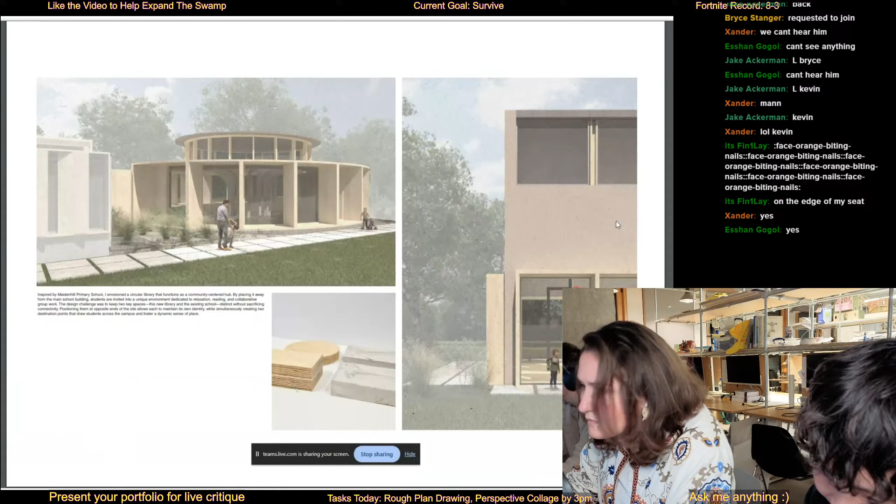With this project, I wanted to have these 2 kind of destinations on either side of the school. So there's this circular library here, and then this big hall.

The hall is positioned as a more public space, accessible by the community. The library is a bit more private, a bit more closed off, and it acts as like a destination for the students in the school.

That's a little image of a floor model I did, exploring the 2 different sides of the school, the library and the hall.

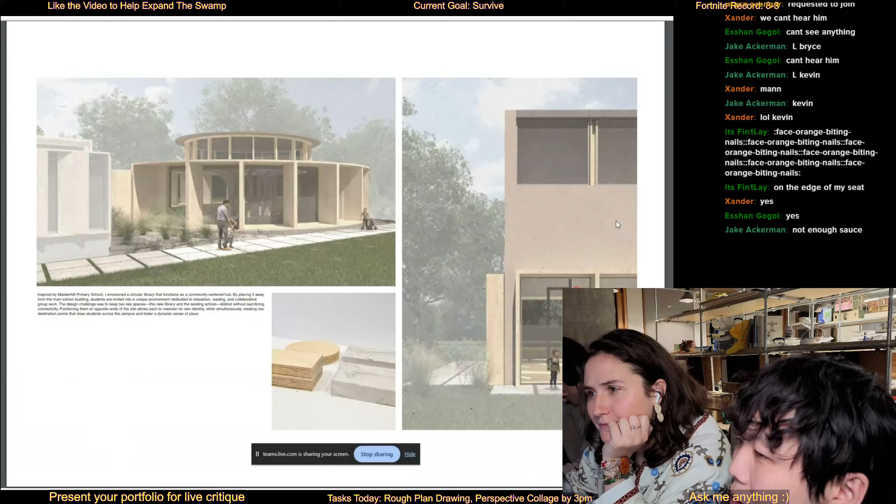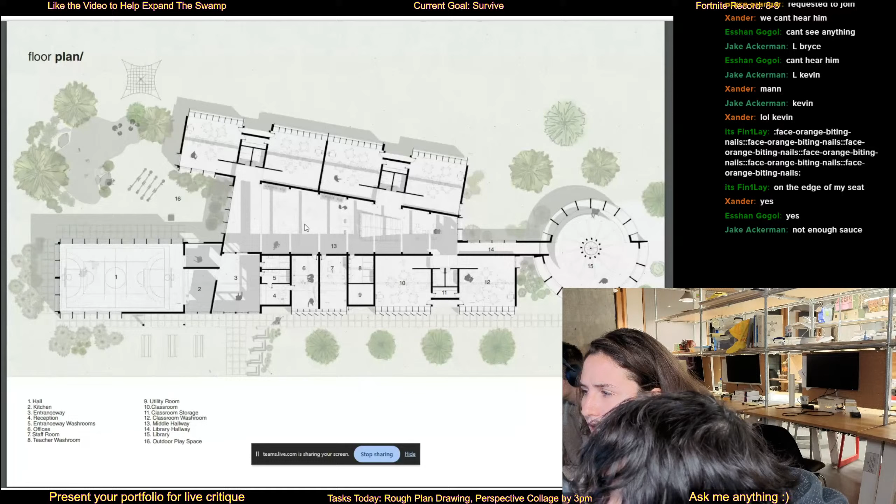There are group meeting spaces, benches, public spaces, private study pods, and that directs you all the way to this circular library here, which acts as the destination for the students in the school.

With our classrooms, you have this divided space in the middle, with storage and washrooms that provide service for both sides of the classroom. On the south-facing facade, you have these window slats that block the light for daylighting.

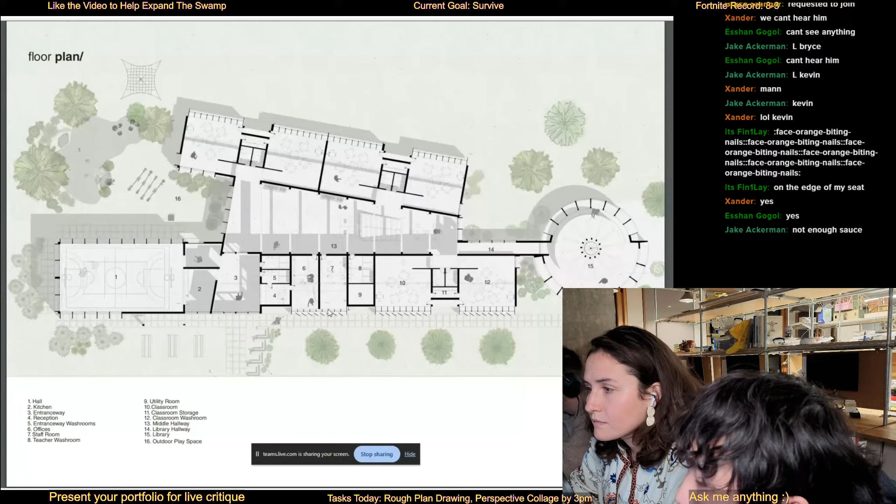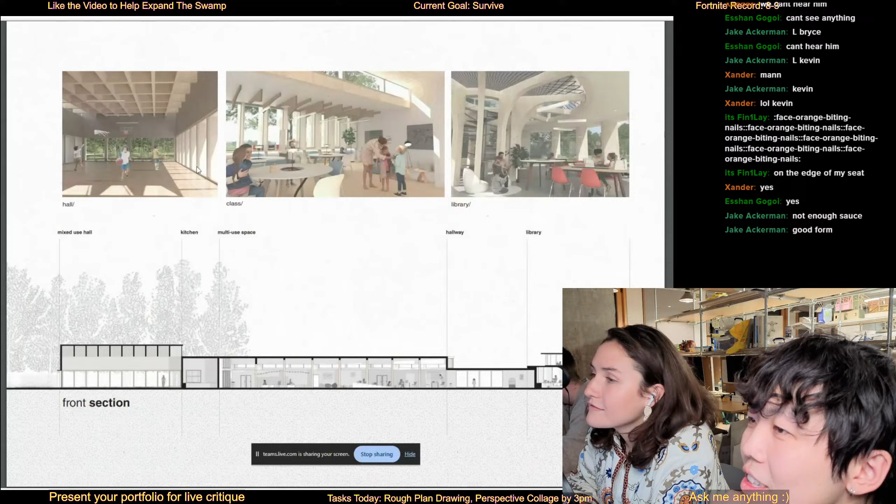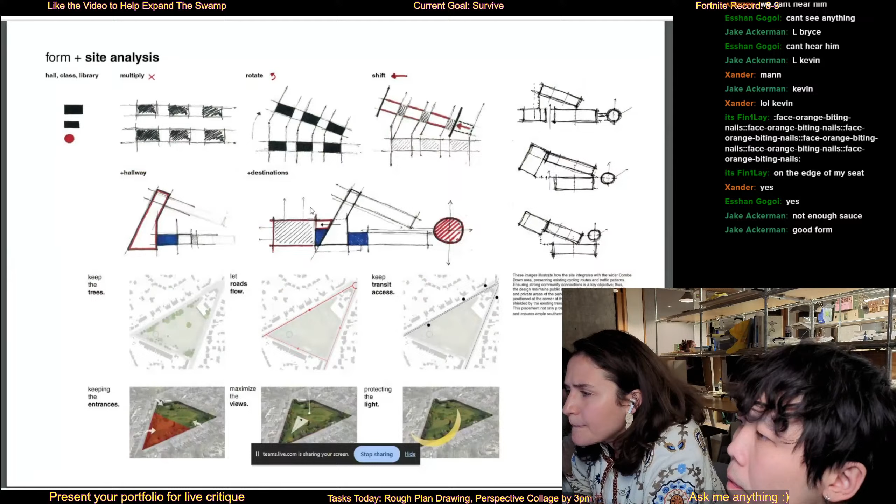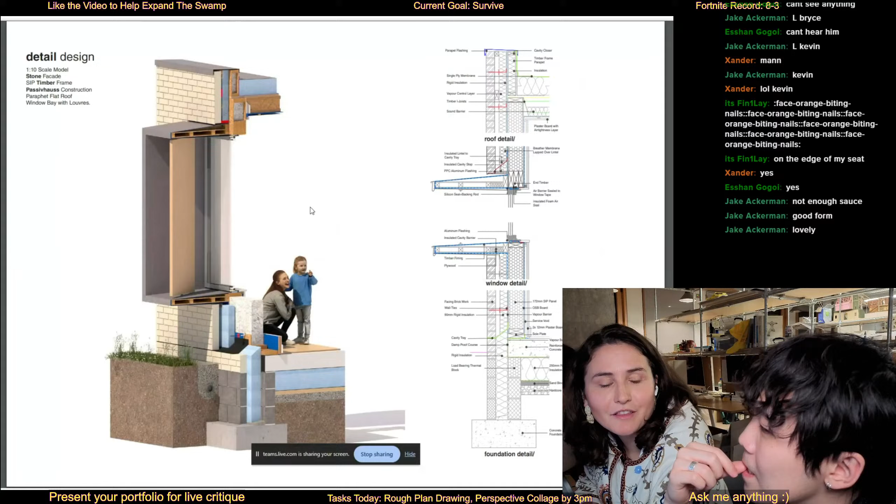Do you want me to just continue, or respond to each slide? Is this the end of this project? We could say stuff about each project rather than... I say we go through the whole thing. Okay, yeah, I think we can go through the whole thing and then go back through it. Okay, fair, let's do that.

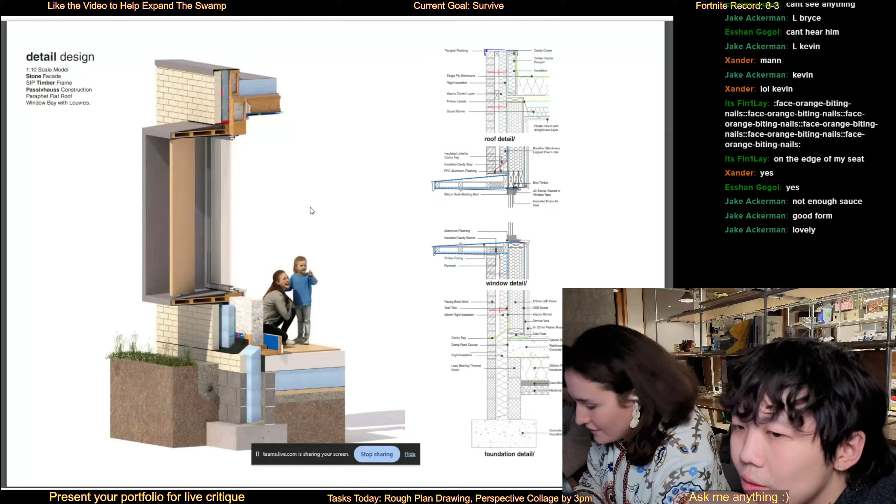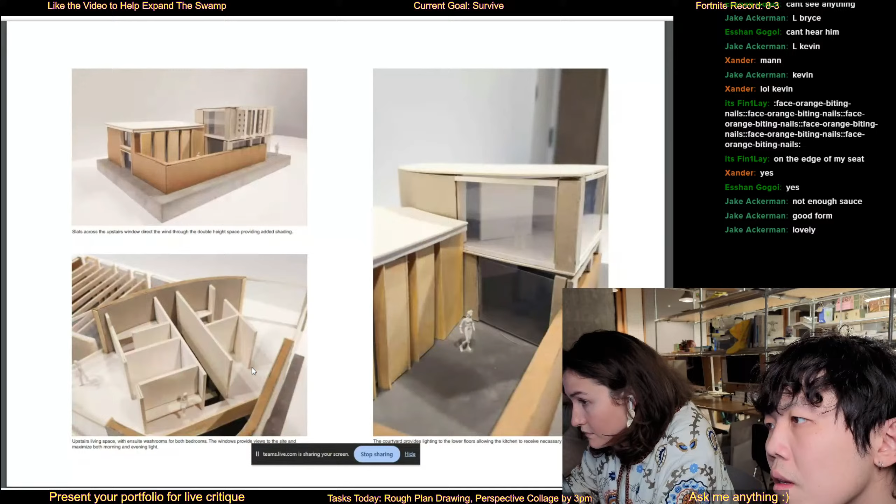Second project here is a house. This was a first year project, end of first year, built for a boat builder on a remote island with a perimeter wall we had to keep, which is why there's this big brown wall. You chose a house based on which artisan you wanted to make it for, and I wanted to do a boat builder. This is a full 1:50 scale model with a concrete base, and you can open up each roof and look inside to see all the details on both floors.

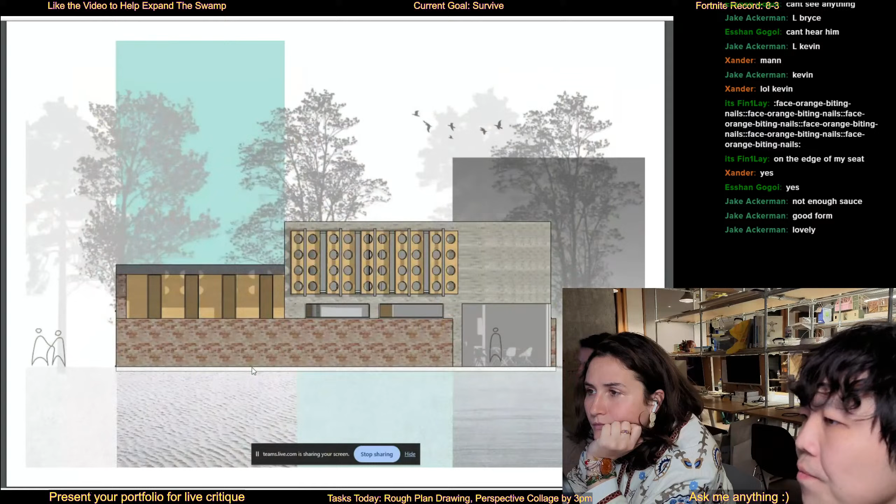That's just the elevation of the house. The form is inspired by the shape of a boat, so you have this curved upper floor, and the challenge was providing circulation while keeping the two spaces separate. These are some concept models working through how to deal with this curved form and bring it all the way down to the bottom floor. That was quite a challenge on this project.

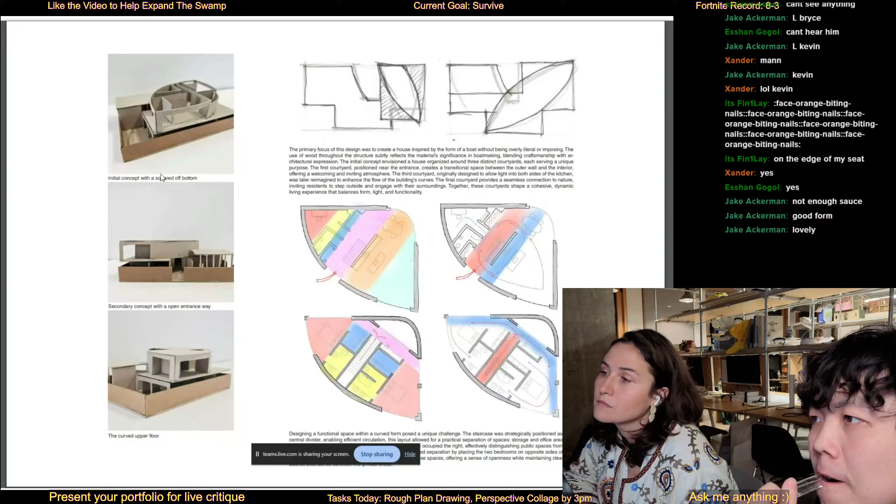I have this dividing staircase in the middle that separates the two spaces. There's an open concept living-dining area, storage along the entranceway, then a washroom with a little office. You come up the second stair to two bedrooms with washrooms and walk-in closets along that side, with a double height opening across the hallway. Sorry, I skipped a few pages there.

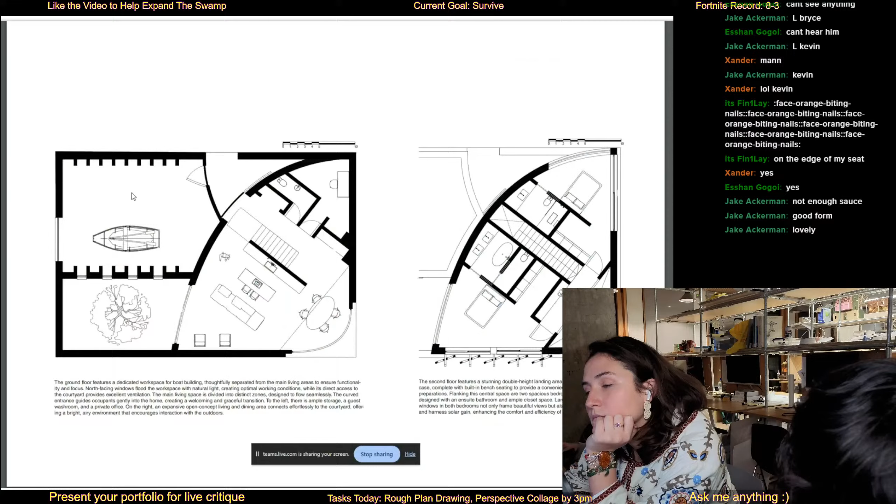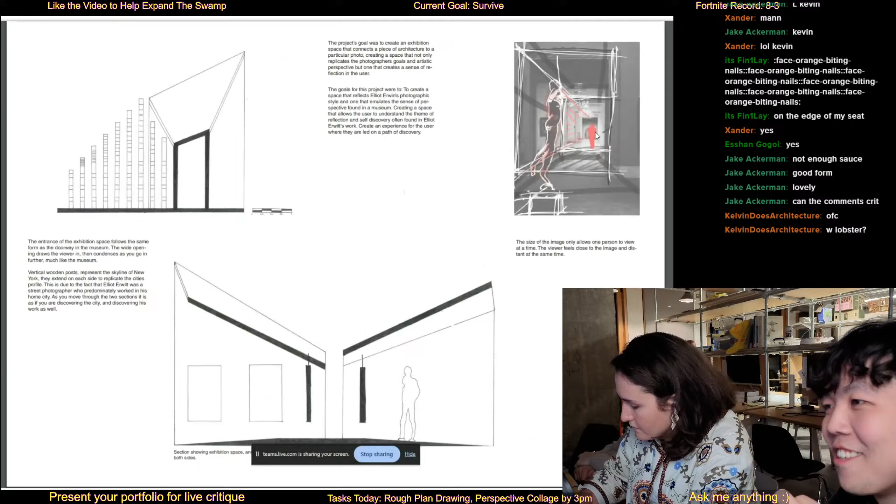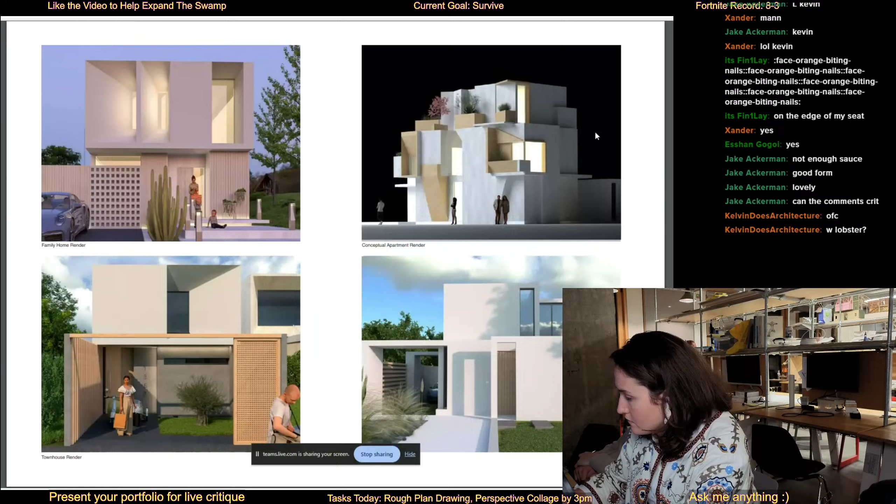So I'm trying to follow the same form of the photograph and create that same feeling that you get when you look at it, basically in the building. Some hand-drawn sketches, and then we have some renders that I've done in my own time, just of homes and kind of conceptual forms and buildings.

Sorry, give me one second. I think, are you muted or something? Yeah, sorry, can't quite hear you. Someone was asking us a question.

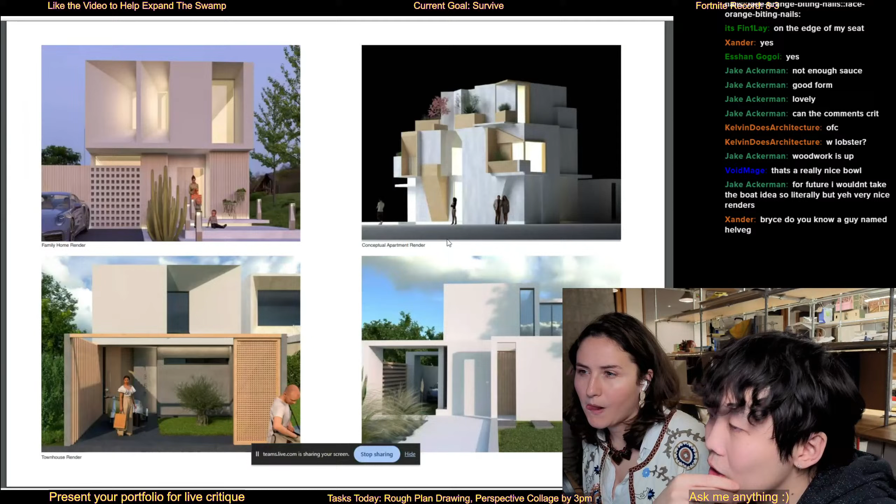Wait, so what's the chronological order of things happening? Which project was first, your earliest project? This stuff is like the earliest. It goes from basically newest to oldest. Oh, this was the oldest. Oh, okay, interesting. And then I think that's a good way of ordering it, though.

Yeah, definitely. I just wasn't sure because you said that one was before school started, the really cool neon lights one, and I wasn't sure what you were doing. I was like, how is he doing all this stuff before school? So I just wanted to check. Yeah, this one was actually before university. I had this class in school and I kind of just made this model. So everything after this is also before school.

Yes, cool. Yana, I'll let you take the lead here. She wants to talk. Okay, I really, really like it. And considering your second year and the work that you had in first year, it's amazing. The attention to detail is amazing.

I will say I really, really liked the pavilion that you did for the photographer, for Elliott Erwitt. Because I feel like that project had a lot of soul, and the way that you told the story of how you came up with the form, I wish you kept that same energy with the way that you tell your university projects as well.

Because the way that you considered the buildings also reminded me a lot of how they did it. Have you watched The Joker with Joaquin Phoenix? I have not. No. You should watch it, it's pretty cool.

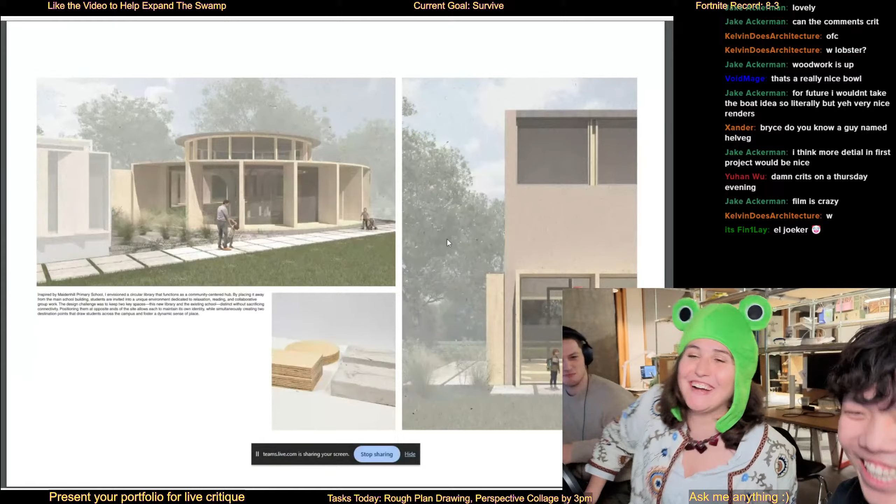ChatGPT does this thing with text where it always puts a dash and then 3 descriptive words after something. So whenever you have a dash - I'm not saying you've used it, but... Oh no, much better. I'll fully admit to it, I've definitely used ChatGPT here. And you called me out on it perfectly. Firing out the accusations - sorry.

Baseless, sorry, but I will say the one giveaway I can always tell is that it has a dash and then 3 descriptive adjectives - like where it says 'key spaces dash this new library and the existing school dash distinct' without sacrificing blah blah blah. You don't naturally use a dash when you're writing text. Yeah, that's very true, okay, very well true. You don't, because you can have such nice connecting words and you don't need to use a dash, you can use something better.

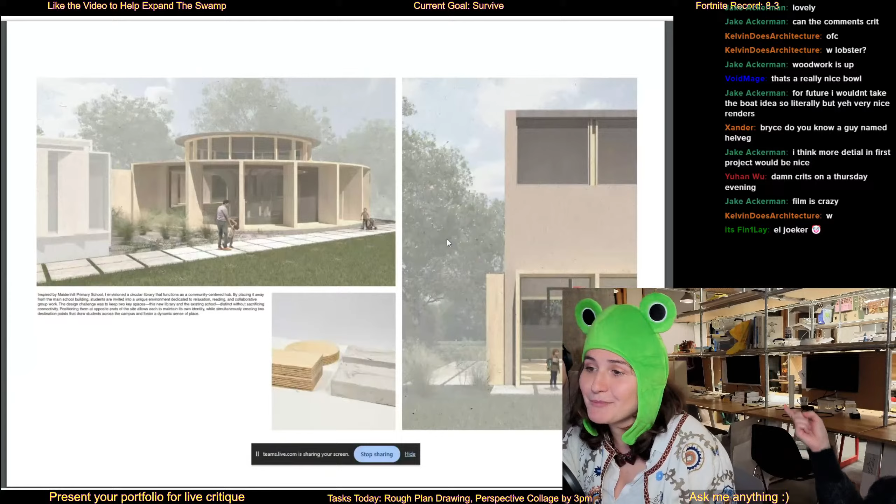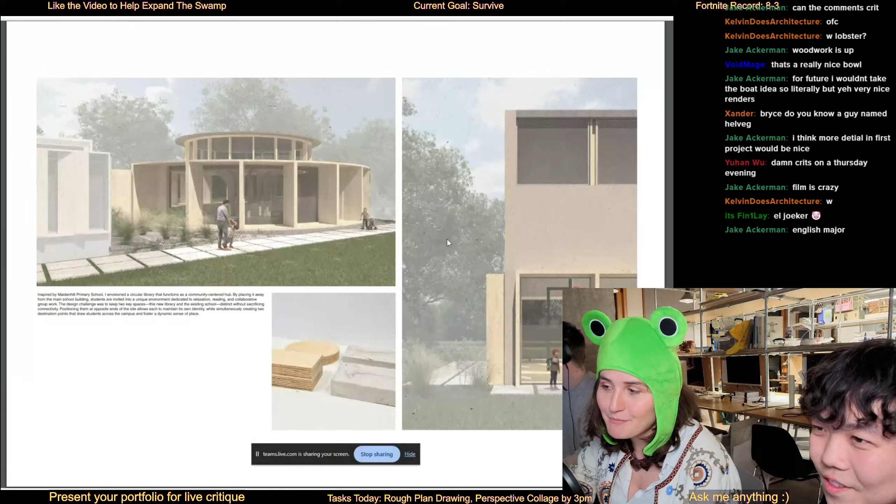Also, I love the quality of these renders. They're very delicate and I feel like they'll come in useful in practice, but I feel like you still need to keep the same magic that you had in your personal projects within the projects you do at uni, because you can tell there's a lot more soul in those projects and a lot more story. If you present them in the same way you told the story of the pavilion, I'd be much more convinced. But this is gorgeous, very cool.

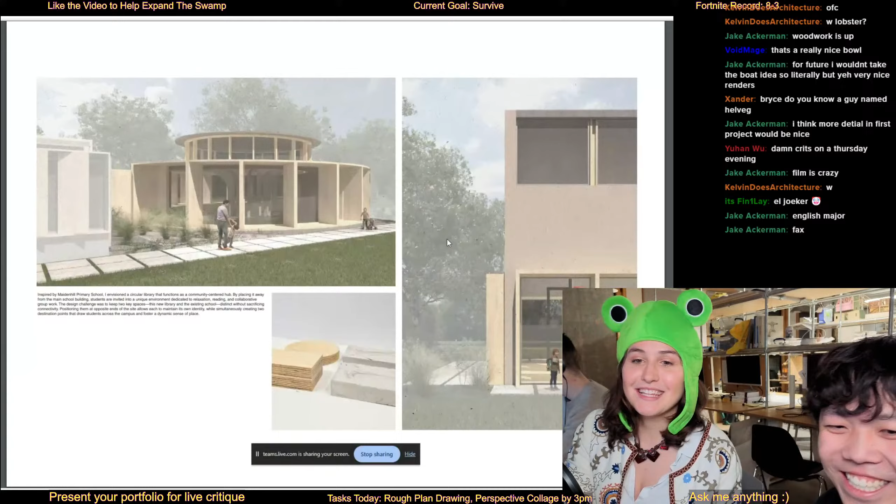What else do I have? Also, in your text - if you keep going down, there's one simple thing you can do to take off. Is he still here? Yeah, no, I'm still here. Yeah, sorry, where should I go? If there's one simple thing you can do in InDesign to take away hyphenation, it just makes it a lot better.

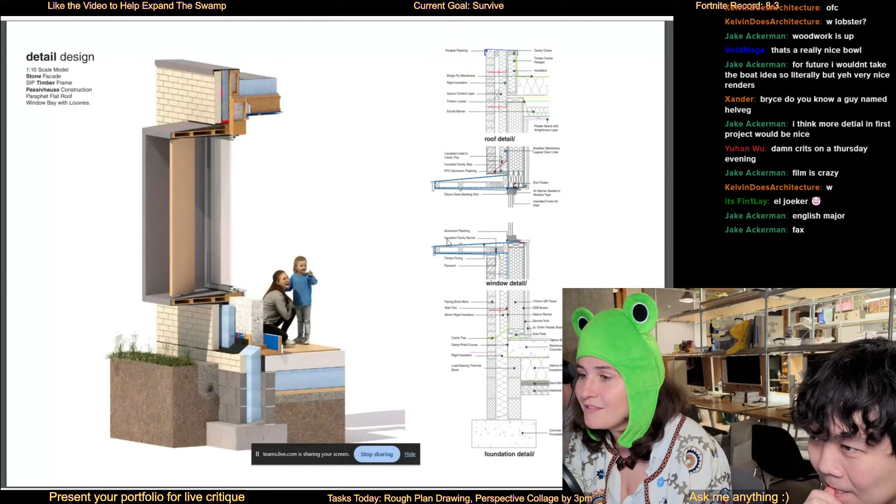I love the plans, by the way. If you go up as well - yeah, these plans are lovely. Site analysis before this stuff - I would too, yeah, I'd switch around the development of the plans and then the floor plan. I'd also put a north arrow in your floor plans and a scale, always.

It's boring, but it helps. Yeah, it does, because the only reason I can tell that this is north is because you had the solar shading on the south side, and that was a really nice technical detail. The people also look too big, I think, right - they don't fit through the doors. Yeah, that's a good point.

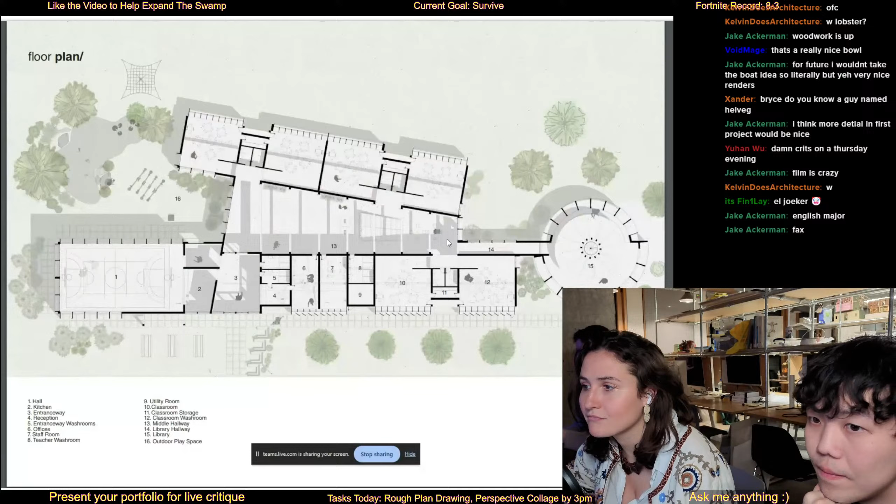But for a second year, amazing - yeah, honestly, you should be really proud. Keep cooking, and I do appreciate that. What else did I say?

I really, really loved the Lobster - yes, that was really cool. Was that a school project? Oh no, that was your personal work, right? No, this was a school project, this was like the very first project of university. That's amazing that this is your first project. Wait, so was it a group project or just paired up with someone? Yeah, it's a group project, we got paired up with engineering students, so they kind of helped us. We built it together, and then a few architects designed it.

But here in the text, sorry, I was reading whilst you were presenting as well, but you have each participant - you've hyphenated the end. If you literally just tick a box in properties, it will take away that hyphenation and it would just read better. I actually did not know that. So yeah, that's super helpful. What you do is go to the text style, click the expand arrow, then go to the paragraph style option. You click on paragraph style, and inside there's a box you untick, and that unhyphenates it.

But it's so well presented, I'm really, really impressed. And it's really simple, really clear, it's lovely, the formatting's really nice. Yeah, it's really clean, you know - like you have 'project 3', which is not an important word, you just need to know it's project 3, and then you have the name of the project, which is the most important thing.

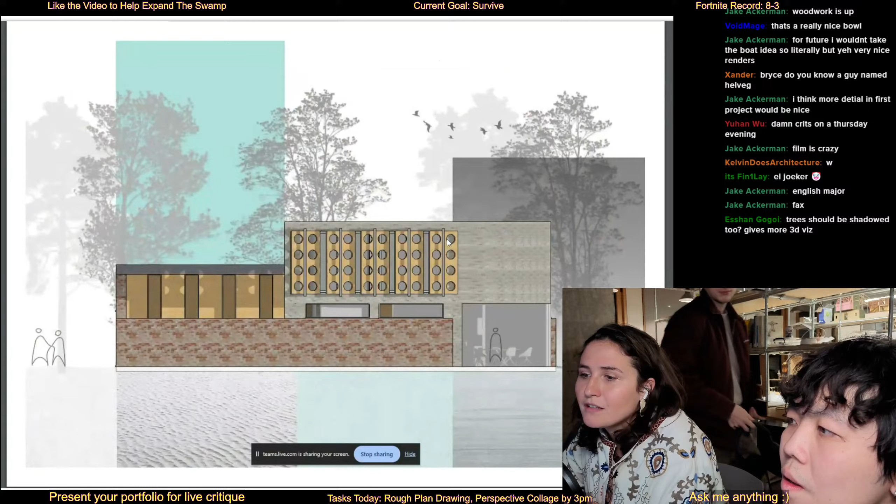Because I think the texture, you can clearly do so much better. Honestly, you could literally redo this - it looks straight out of SketchUp.

You in a rush? Tired as fuck. Yeah, that's fair, fins off. All right, are you not going with Finn?

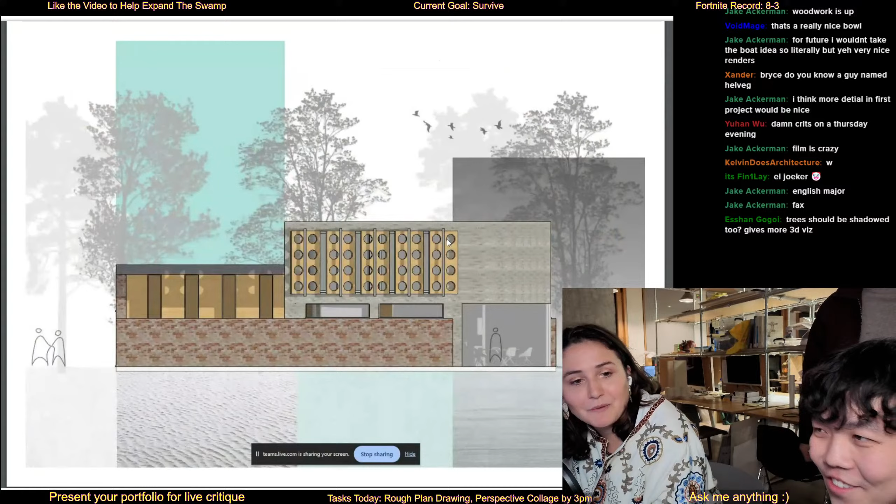Got anything to say? Finn is a bit of a goat.

I think it's good - good renders for a second year especially. Yeah, very good renders for a second year.

You know, add sauce, always add sauce. Also, SketchUp, but - yeah, as Jake says as well, add sauce.

This is definitely one that does not show similar quality to the rest of the portfolio. I'd take this out.

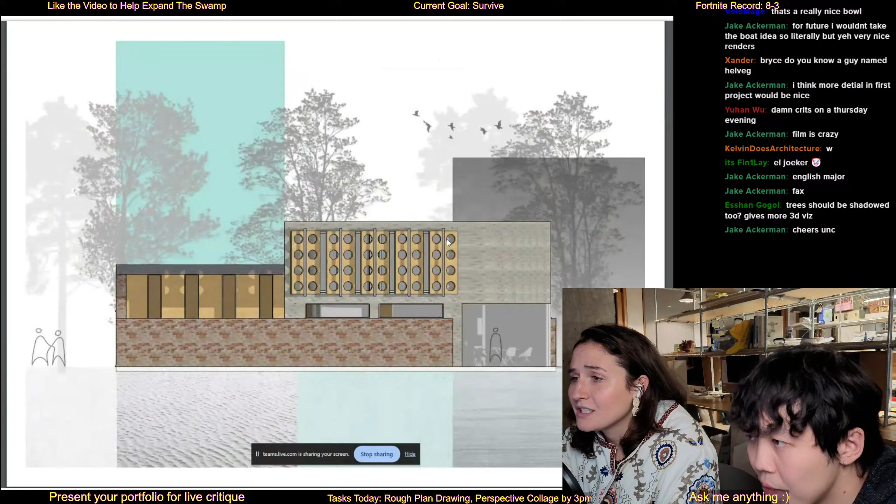Not to be like that, but you're letting yourself down because you can do better - unless you're going to redo it nicer. Everything else you have is so much richer.

And the models are so nice for this project. The elevation I was surprised by, but it's really good for a first year. Even the plans - the fact that you considered the form of the boat and everything shows you've started to think.

It's very similar to a book - Robert Venturi talks a lot about symbolism and semiotics in architecture. I think it would be really nice, especially when you go into third year, to start weaving theory into your projects.

And the fact that you use the form of the boat - there's this library in Qatar. Can we Google something? Can we Google the Panopticon by Los Carpinteros, with an A.

Los C-A-R-P-I-N-T-E-R-O-S. Jesus, this one, okay I'll just look it up.